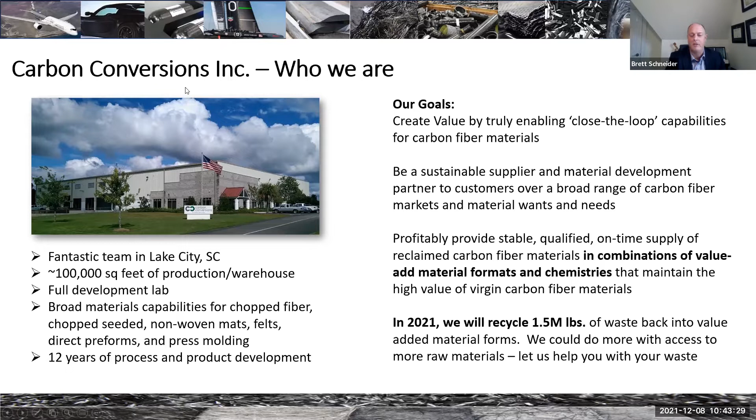So the modulus is where the value is, and if you don't track your IM or your standard moduluses, then you end up providing sub-performing products which don't have the value back in the supply chain they should. So we track modulus, we combine it with different material formats and chemistries to provide that value back. And in 2021, this year alone, we'll recycle 1.5 million pounds, keep that out of the landfill, and provide it back as a value-added product to the customers.

So just at a high level, from a waste perspective, what do you do with 180 million pounds of carbon fiber a year? I think Dan had a little bigger number yesterday we were talking about, and this is a bit old, but as the aerospace recovery happens, I think the volumes here are only going north, especially with the new announcements and expansions. So 2 to 4% of this volume is wasted by the producers. It comes from the precursor or the fiber lines itself, and we get access to that.

30% more is wasted roughly as intermediates. So as you weave it, you make it into non-crimped fabrics, you put it down a pultrusion line, you put it through a winder. There's a lot of intermediate waste in that process, and we try to capture that. And then what we're starting to talk about as an industry is, once you've produced your part, then it has a life of doing things, right? It travels around the world, it spins in the air, it creates services, it does defense.

But as those things age out at the end of life in 20 to 30 years, those become large volumes of reclaimable carbon fiber that has a lot of value. And we're now starting to see that in the industry come back. And so we're learning how to use those different waste streams and put them back into something value added. So we also think about demand going up, and capital assets are expensive.

So we don't believe carbon fiber gets a lot cheaper going forward. In fact, given the cost of oil today and the cost of assets as you build in inflation, carbon fiber probably costs more in the future. So the idea of using a recycled fiber that does save an awful lot of the expense of making the virgin fiber does make a lot of sense if these product forms can work for you or you can design

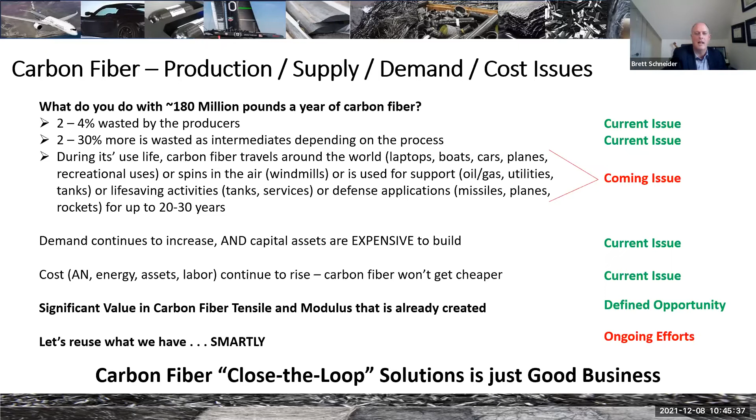them in. We think there's a lot of value in the tensile and the modulus, and we know that the modulus is recoverable. The tensile can be, depending on the chop length and how you get alignment in a fabric, but for the most part, we're talking about bringing modulus back to the industry. And we know how to do it. We know how to close these loops, so we know we can be successful at it. So it's really about working with customers to bring it back around full circle.

Just a quick graphic. If you don't want to recycle and reuse, and this is the process on the left that we go through in making and consuming carbon fiber, then what you get on the right is what happens in the world, right? You get a bunch of intermediates that all go to the landfill, and you get a bunch of end-of-life products that eventually will all go to the landfill. And as you can see, they often get parked in the desert or buried in the desert, and that's just not good for the environment. It's not good for the industry, and it's certainly not good for the overall cost structure of how we could use these things more efficiently.

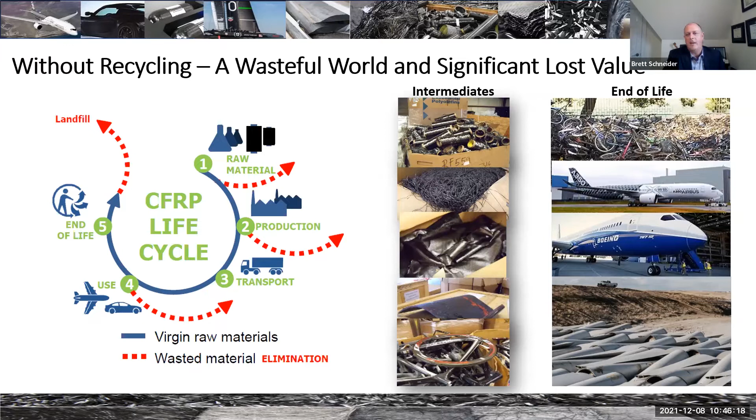So all of those intermediates that you see in that column we use today, and we're already working on a lot of those end-of-life applications and bringing those back through into value-added product forms. So when we think about carbon fiber from a recycled perspective, we've done a lot of work over the years around the value of that, how to think about the value of that. So fiber tow is the most expensive fiber form you can get. It's at the top of the pyramid. It also has the most value from a tensile and modulus perspective. It's not been handled, and we love to get that type of product from the in-process people.

But if you drop down into fabrics and braids and what we call other dry process waste, that has a lot of value because it hasn't been too damaged. If you drop down into unidirectional and fabric prepregs where they've been wet out with either an epoxy or a thermoplastic in some cases, you're starting to lose a little bit of the value. The energy required to get at that modulus and back into a product form starts to go up. And then you get down to this post-consumer world, end of life materials. The modulus there is still very credible. It's still easy to use, but it does, again, take a bit more energy to get at it.

And so we look at this as there's a lot of value in your waste streams at the top of this pyramid versus the bottom of this pyramid, but modulus holds throughout that whole story. And so as an industry, we mostly started towards the top of this pyramid, but now we're learning how to use the bottom of this pyramid. So as these things reach end of life and the volumes tick up on what's available, through product forms other than chop, so different variety of non-wovens, different variety of 3D printed forms and so on, we can get these things back into industry that makes sense.

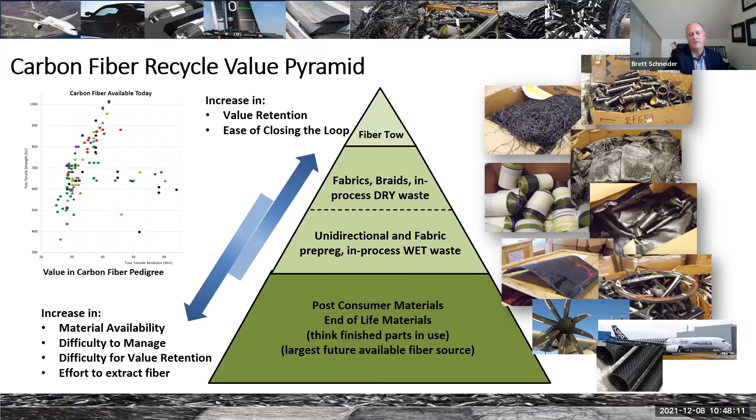The upper left there, which I think everybody in this world has talked about at some point, just talks about all carbon fibers aren't the same. At Carbon Conversions, we recognize that, we believe in that, and so we track the different inbound raw materials to segregate out different moduli and tensiles so we can create value back to the different customer bases. So if you want to truly close the loop, this is what it looks like. We capture the different waste streams around the edge of the process, and when things get to their end of life, we bring them back as well. We create, through a variety of methods, chopped fiber of different lengths.

We can either resize that and give it into compounders, but what we really like to do is make non-woven materials or preforms out of that. We have technology that goes direct to preform through a wet laid process, so you can skip the non-woven value add, and then those can go straight into parts, and you can either infuse those parts today, or a lot of what we're doing with Dell today, and that's very public, and you can go to YouTube and watch the videos that Dell has put out, is we make a chopped thermoplastic carbon fiber hybrid non-woven, and that basically just gets a direct compression mold.

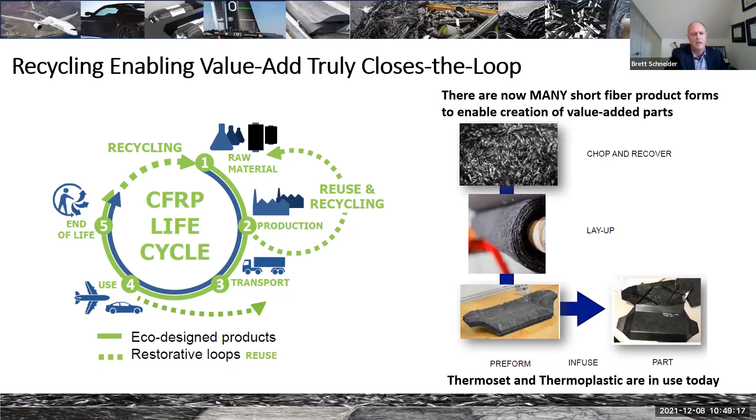So if you're using Dell laptops today, you've likely got our material in your A and your B cover of that laptop, along with some materials from SABIC that we support. So there's a large close the loop happening today, and I think Dell's pretty happy with that, and they talk very publicly about it. So it's great.

So when you think about just from the supply chain, how does that look differently? We source different waste streams, whether they be bobbins, cured parts, anything in between. We choose to use pyrolysis and then chop that up into different formats. We also acquire waste streams from some of the other companies that don't have a lot of value add capability, but do recycle into these fuzzier carbon fiber forms. We know how to work with all that.

We can turn it into chopped materials, or sized. We can turn it into a variety of non-wovens. We can make those non-wovens into thermoplastic prepregs, or we can go direct to part by going through a preform process where you skip the non-woven altogether. So if you're making something larger like a jet ski, a boat, a drone, things that you could go direct to an infusible component of several square meters, you can save a lot of money by going direct to preform and skipping a lot of the value add of the dry goods and then having to kit cut that and hand lay it up and so on.

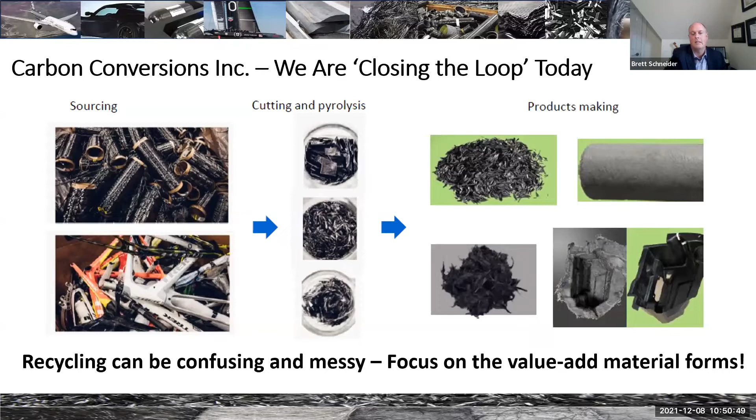So the reality is the industry's come a long ways. Recycling in your supply chain and how you get that back in a part can be a bit confusing. It is awfully messy. We think we're pretty good at it. And if you focus on the value add of the different material forms and work with someone like Carbon Conversions, we can usually find a solution that'll get something back to you at a lower cost and better application of a recycled carbon fiber, which helps you with your ESG story.

So we provide a variety of forms that are all branded and commercial today and at scale and running. So we have our high strength chop, we have our intermediate modulus chop, different chemistries and oversizings, and then we have our different recycled carbon fiber mat materials, which are really a range of non-wovens, different sizings, different chemistries, different thermoplastics can be put in those. And then we have the commingled thermoplastic fiber mats themselves that Dell is quite happy with, and we've seen some applications in some drone applications and some bracketry and so on.

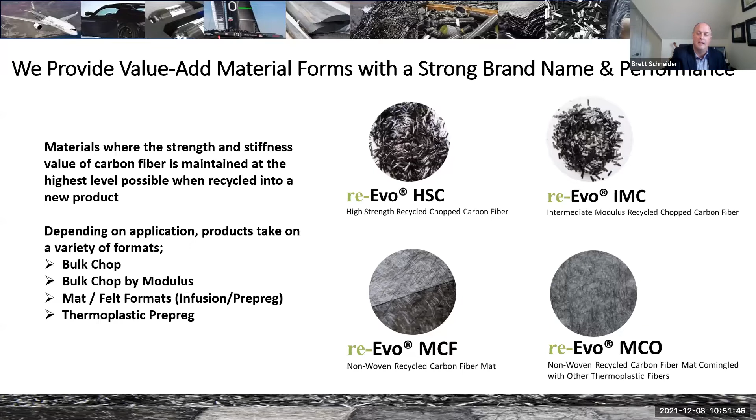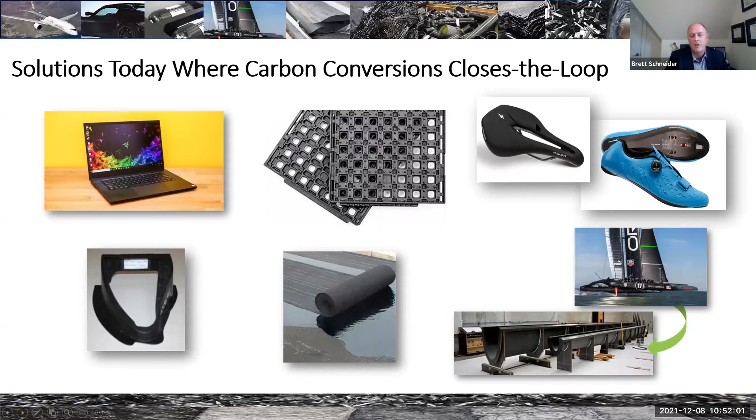So from those perspectives, there's lots of ways to get at a waste stream of carbon fiber and bring it back into a value-added, formable, curable part where you're getting the benefit of some of that tensile, but almost the entire modulus. Solutions where we see our applications today include everything from laptops and chip trays and finished bike parts and molds for industry and industrial applications around structure and cured parts in automotive.

With Collins, we've got an NDA in place. We'll talk about this here just real quick, just because of the aerospace vein here. So Hexcel is a part owner of CCI. We work with Hexcel, we work with Toray, we work with a variety of aerospace customers. What we really do is try to capture the waste streams, bring it back through this process we've talked about into non-wovens and then back into cured parts. And often we do that under NDA, so we can't talk about a lot of what's going on.

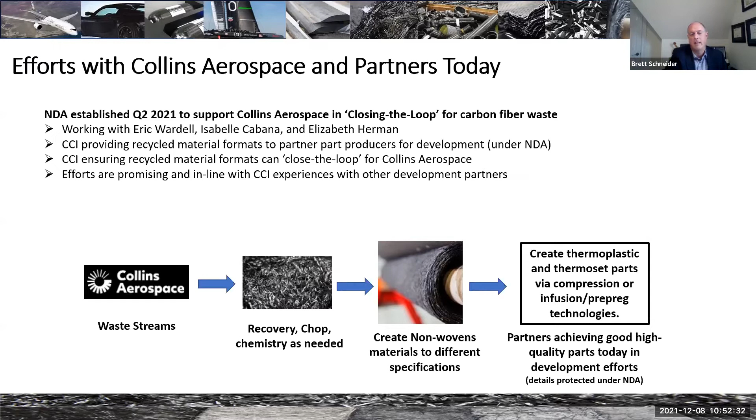But I think the opportunities I would summarize is that if you've got an opportunity out there where you're using a woven carbon fiber today, or you're using any type of non-woven or mat material, or even a very thin layer of unidirectional, where that unidirectional is mostly providing you stiffness, not tensile strength, then these materials have been tested, they are qualified, they're certified, and they actually can replace a lot of that.

And we see that with different customers. And so we've got a few pictures here of the types of things one might imagine are commercialized or commercializable or under NDA and being done. And I would just tell you that there's a lot more around this space, to the point that we are actually sold out. So we are looking for more waste streams to capture.

We're looking for more raw goods to work with because we've got more customer demand for the value-added products than we actually have raw material to produce, which is partly a COVID supply chain impact on what Dan talked about yesterday and some of the supply and hit from the aerospace, and some of it's just the fact that not everybody is aware that you can recycle your waste streams back through someone like Carbon Conversions.

So when we think about the future and what we're working on from a development perspective, there's an awful lot of carbon in wind blades. There's an awful lot of intermediate modulus carbon in aerospace, and there's some fantastic carbon being developed now for pressure vessels. All of these have lifespans. All of these will have an end of life.

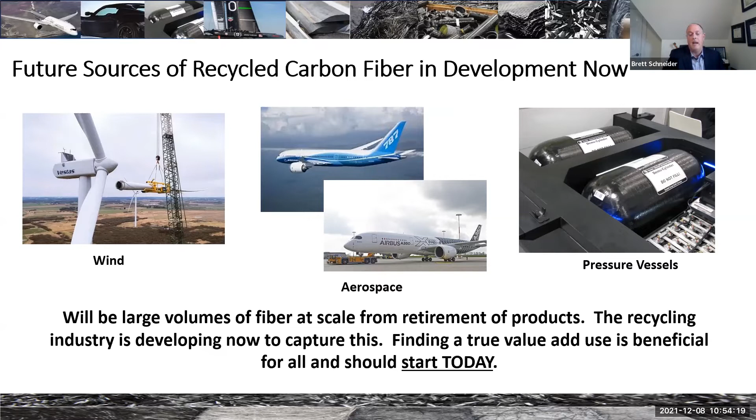We are working under NDA in all of these areas today on how to capture that, put it back through into some pretty high value product forms. And in some cases, it goes back into these applications. But in a lot of places, it goes back into a different application where there's plenty of demand for the modulus, and we can convert that through.

So how can you help close the loop? This is what we do. If you're thinking about what you can do as a company or as an individual, my first request would be: if you produce carbon fiber, send your waste streams to a recycler. And if not Carbon Conversions, pick somebody else. But all carbon fiber is recyclable, and if you have it on a bobbin, it can be recycled.

If you use carbon fiber and you have waste from your processes, it really doesn't matter if it's a cured waste, a sticky waste, a dry waste, or the ends on the bobbins. All of that can be repurposed. So you should be talking to a recycler, see about what the value of those different pieces are. In some cases, there's actual value for us to pay for it. In some cases, it's just that we ship it away from you. But in all cases, we can recycle it.

And then if you make materials in short carbon format, using carbon fiber from a recycled source today, that would be best. So if you are doing anything in the compounding, non-woven, mat consumption area, and you're paying for and using virgin fiber, there's an obvious choice where you could switch over to a recycled carbon fiber in your supply base.

And then if you're a designer, think about the product forms we've just talked about. Talk to us about other product forms that are under development. How could you design those into a future product? How could you make some of your raw material supply chain an ESG story? And then deciding that you and your company can and will close the loop wherever possible is a big statement. And then that helps everybody focus around the top four items here about what we're talking about.

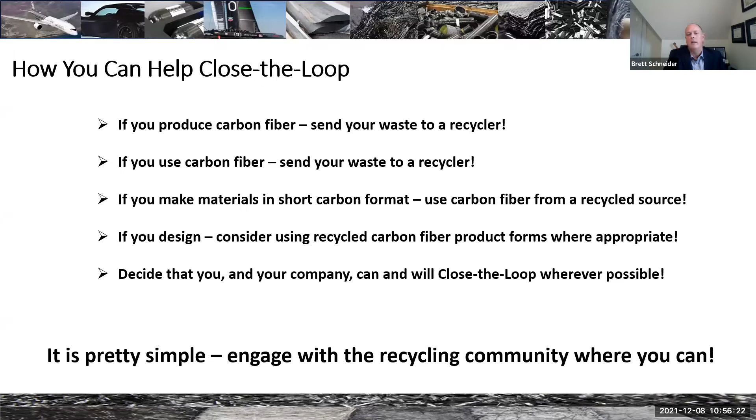So it's pretty simple as the concept of how you can help close the loop. And it's basically engaging with the recycling community. This couple days here with this group is a fantastic opportunity to discuss it. But the reality is it really is moving quite rapidly from an R&D, 10 years of discussing how you could do it and why you should do it, to we are doing it today. It's commercial, and there's no reason for you not to be doing it.

So Carbon Conversions provides products for your processes that are qualified, certified. We're an ISO certified plant. We can help close the loop. Our goal is to be a great partner. We appreciate, given our backgrounds in composites, that not every material form we have solves the problem, right? So we're always developing new material forms. That's part of the industry we're in.

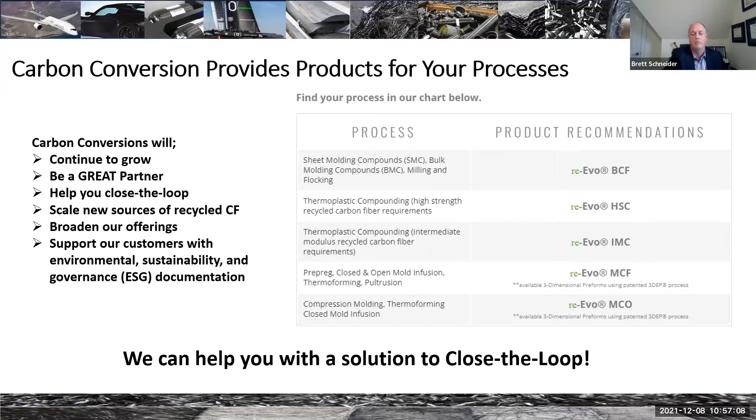All of those new material forms used waste carbon fiber in some form, and that's the ESG story. And then on the other side of it, we're a great partner to take your waste if that's something you want to do, and we can even provide certificates that your material was recycled, so that you can truly close your loop and talk about your ESG story, and we're part of that.

And that's really what I had to talk about and present. Fairly rapid fire there. I tend to talk kind of quick if you know me, but that's the story, and it's a good story. It's a commercial story. We're available anytime to talk about what we can do for you, what we can sell to you, or what we can consume from you. So with that, I'll open it back up for some questions.

Thank you so much, Brett. We do have a couple questions in the chat. The first question here, from Deborah Chung, is that it may be interesting to explore the vibration damping ability of the recycled fiber composites compared to the virgin fiber composites.

Any information on this? Yeah, so the damping effect has a lot to do with the resin chemistry, and it has a lot to do with your frequencies and your nodes and what you're trying to manage. And chopped fiber form does help break that up, right? So is there better damping with the types of products we produce than a virgin unidirectional or something? The answer is absolutely yes. The question is, are you designing around damping because you need that tensile strength, or can you get by with just the modulus and the stiffness and manage it that way?

So what I can say hand on heart is that the non-wovens we produce provide you as much, if not more, stiffness than unidirectional and woven prepregs. They're incredibly stiff, especially the heavier weight materials that you can infuse. They are incredibly challenging to turn into a prepreg, though, because of the density in the pack of our materials, but you do give up an awful lot on tensile strength, right? So our materials are great behind a layer of woven, or if you like the more organic look, you can go right into a part with ours, and they certainly help in that way.